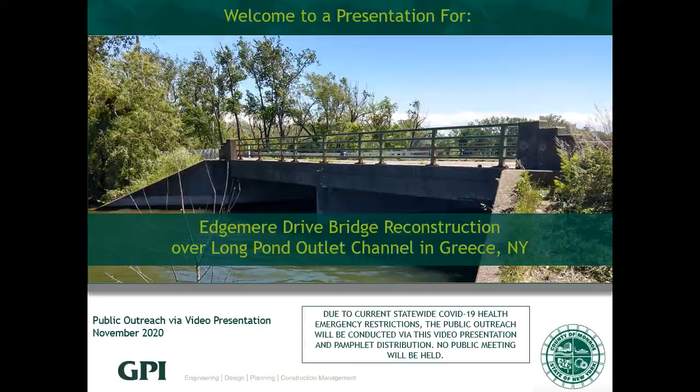This presentation is intended to allow interested parties to review the project details, comment, and ask questions of the Monroe County Department of Transportation, MCDOT, as well as the consultant design staff.

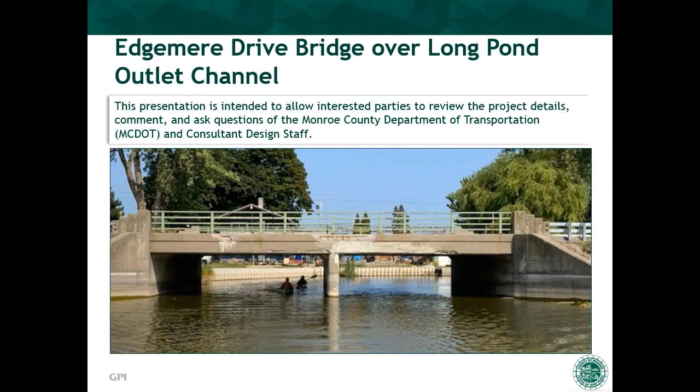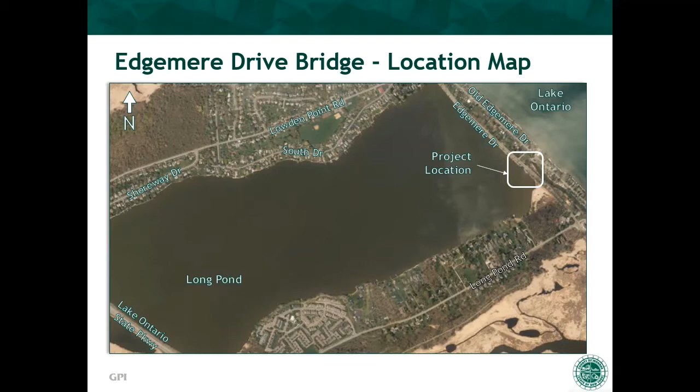Please turn your attention to the aerial image with the approximate project location at the existing Edgemere Drive Bridge. Here is a closer look at the project location. From this aerial, we can see that east of the project, along the Long Pond Outlet Channel, is Goodwin Park and an existing pedestrian bridge over the outlet canal.

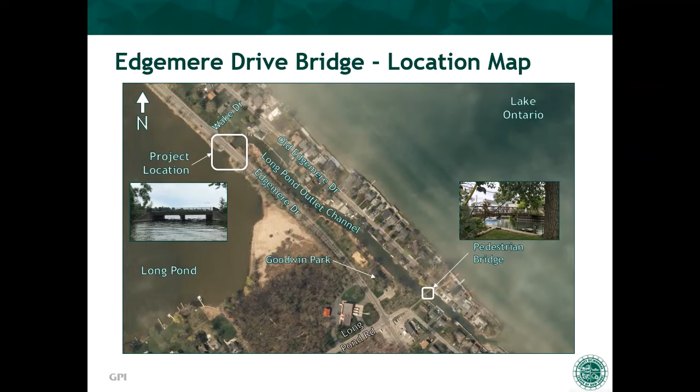The Edgemere Drive Bridge over Long Pond Channel was built in 1953 and is exhibiting several deficiencies that will need to be addressed. The existing bridge is a two-span, 50-foot long reinforced concrete structure with the following features: two clear spans under the bridge of 25 feet each.

Two 12-foot wide travel lanes, one lane in each direction, two 6-foot wide shoulders, two 5-foot wide sidewalks. Clearance between rails is 46 feet.

The existing bridge has a maximum underside elevation of approximately 253 feet. Based on ordinary high water elevation of 246 feet, the clearance above the water surface of the bottom of the bridge is approximately 7 feet under normal conditions.

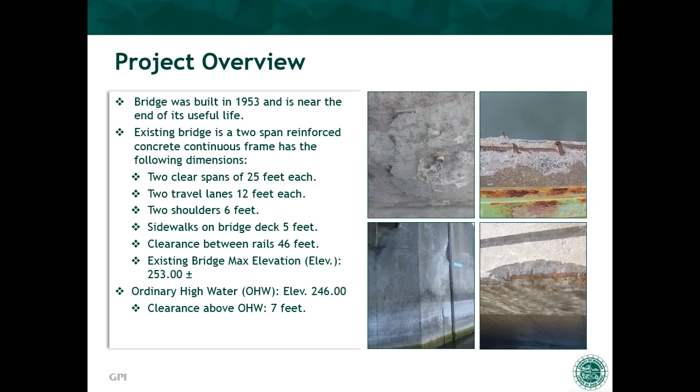New York State DOT collected traffic data along Edgemere Drive in July 2019 and has determined that the current traffic volume in this segment of Edgemere Drive is approximately 2,900 vehicles per day. During the most recent 3-year time period, no accidents were reported in the project vicinity.

There are no hydraulic concerns at the bridge. The water level beneath the bridge is controlled by Lake Ontario, and the flow of water along the canal is considered very minimal. The bridge replacement has no impact on the water level in Long Pond or the Long Pond Outlet Canal.

There are no New York State DEC regulated wetlands within the project limits, but there are federal wetlands present. All necessary permits will be acquired before work commences in the spring of 2022.

While there are no federally endangered species located within the project limits, there are some New York State DEC listed birds that may nest within the vicinity of the bridge.

Measures will be taken to ensure suitable habitats where the birds will not be impacted. In addition, further investigation may be required due to the potential presence of freshwater mussels located within Long Pond.

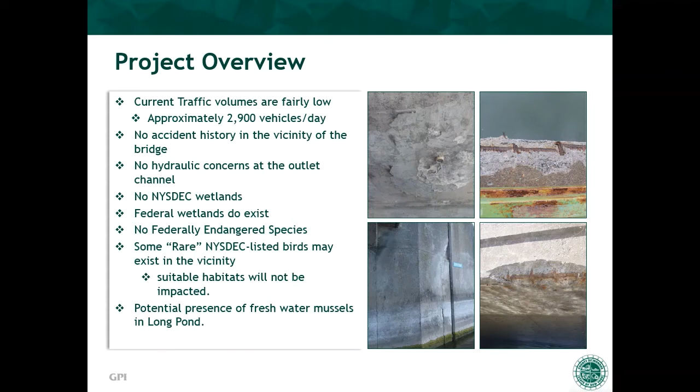The Edgemere Drive highway boundary is 100 feet wide in the vicinity of the bridge. There will be no right-of-way acquisition required for the construction of this project.

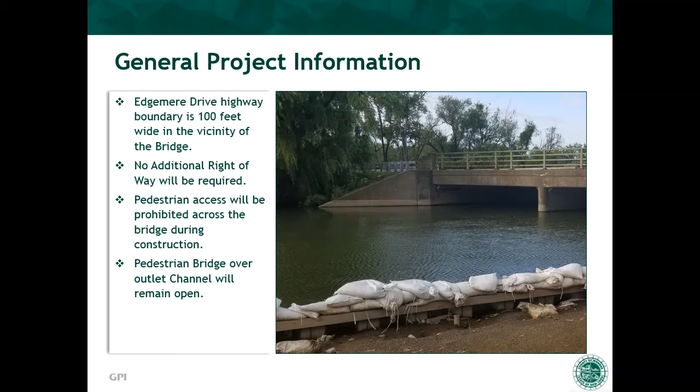During construction, vehicle and pedestrian access across the bridge will be prohibited. The existing pedestrian bridge over the outlet channel, located approximately a quarter of a mile east, will remain open for pedestrian traffic during and after construction.

The design team has prepared a list of objectives for this project. These objectives are: reconstruction of the existing bridge with a modern structure that will meet current structural, hydraulic, and geometrical codes and standards; provide a low or maintenance-free structure that will provide at least 75 years of service life.

Increase the navigational clearance for watercraft under the bridge, if feasible and reasonable. Make general site improvements, if feasible and reasonable.

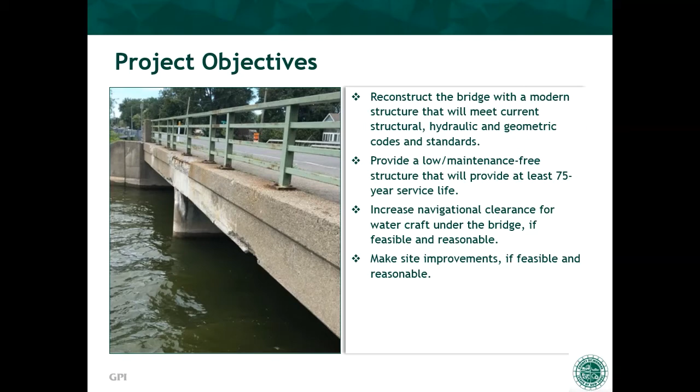The current clearance under Edgemere Drive Bridge, based on the water elevation of 246 feet, is approximately 7 feet, while the clearance for the pedestrian bridge at the same water elevation is approximately 7 feet, 8 inches.

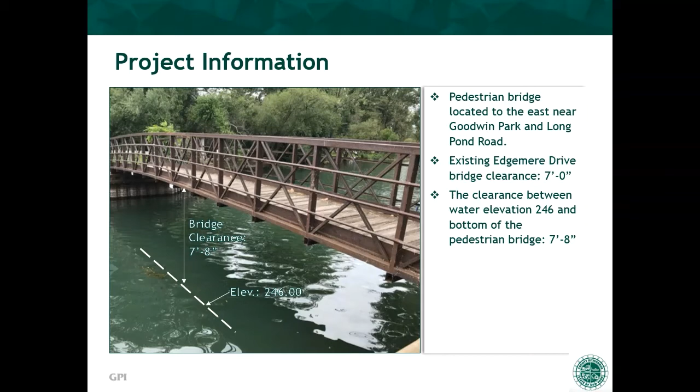There are 5 project alternatives that have been considered for this project. Alternative 1 is the no-build or null alternative. This alternative is normally discussed as a point of comparison to help justify the need for improvements. Under this alternative, the bridge would require an increased amount of maintenance, repair, and would continue to deteriorate to the point where it would be impossible to maintain traffic. At this point, the bridge would have to be closed to traffic and thus not considered a feasible alternative.

Alternative 2A and 2B propose the construction of a steel girder bridge. Alternative 2A would raise the road grade by about 3.5 feet and increase the underbridge clearance by about 1.5 feet. Alternative 2B would raise the existing road grade by about half a foot and would result in a decrease of the underbridge clearance by 1.5 feet due to the deeper bridge beam.

Alternative 3A and 3B propose the construction of a precast concrete arch bridge. Alternative 3A would raise the roadway grade at the bridge by about 3.5 feet and increase the underbridge clearance by 2.5 feet. Alternative 3B would raise the existing roadway grade by about a half a foot and result in a slight increase of the underbridge clearance by about a foot near the center of the arch, but decrease the clearance along the edges of the arch on average 2 feet.

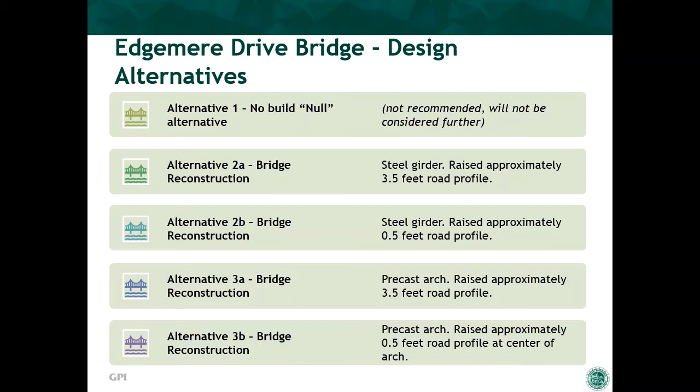This slide further summarizes the features of Alternative 2A and shows a graphic of how the new bridge would fit into the road grade and compare to the existing bridge. As previously mentioned, this alternative would raise the road grade of the bridge by about 3.5 feet and increase the underbridge clearance by 1.5 feet. It is important to note now that all bridge alternatives propose to eliminate the center pier. This will create a continuous span over the channel and improve the navigation under the bridge. This alternative is not recommended by Monroe County due to the maintenance concerns and regular painting requirements associated with steel structures over water.

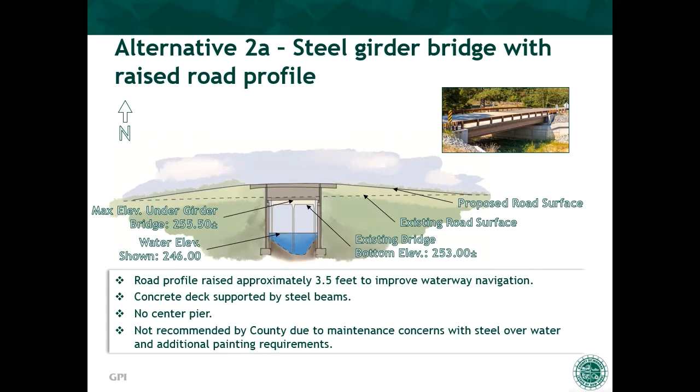Alternative 2B is very similar to Alternative 2A. However, it more closely matches the existing road. As stated before, Alternative 2B would raise the existing road grade by half a foot and would result in a decrease of the underbridge clearance by 1.5 feet due to the deeper bridge beams. This alternative is not recommended by Monroe County due to the maintenance concerns highlighted in the previous alternative and due to the decreased clearance.

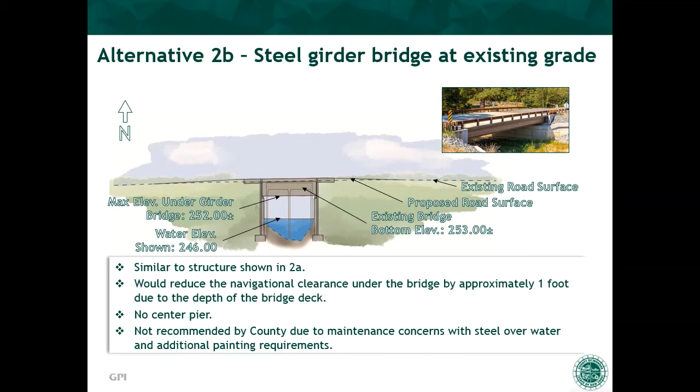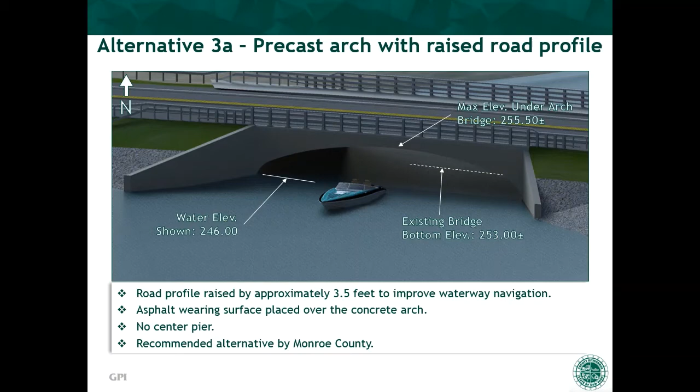Alternative 3A proposes the construction of a precast concrete arch bridge with asphalt surface. The road grade at the bridge would be raised by 3.5 feet to increase the underbridge clearance by approximately 2.5 feet. Additional site enhancements consist of side slope improvements from the edge of the pavement to the water with a combination of turf near the road and stone slope protection near the water surface. Alternative 3A is the recommended alternative due to the reduced maintenance cost, durability, aesthetics, quality, and improvement to navigational capacities.

Alternative 3B proposes the construction of a precast concrete arch bridge at the existing road grade. This would result in a slight increase of the underbridge clearance by about a foot near the center of the arch. However, it would decrease the clearance along the edges of the arch by an average of 2 feet. This alternative is not recommended by Monroe County due to the decreased navigational clearance near the edges of the arch.

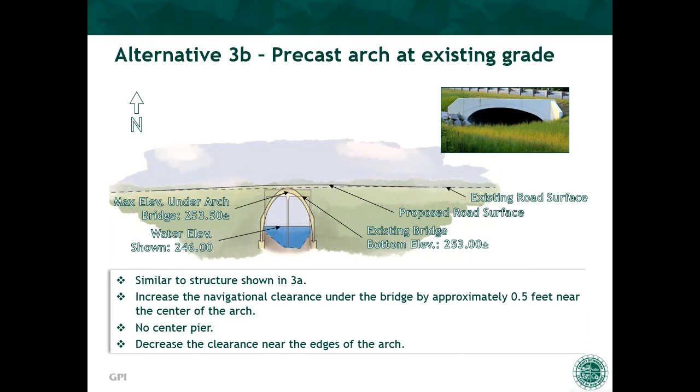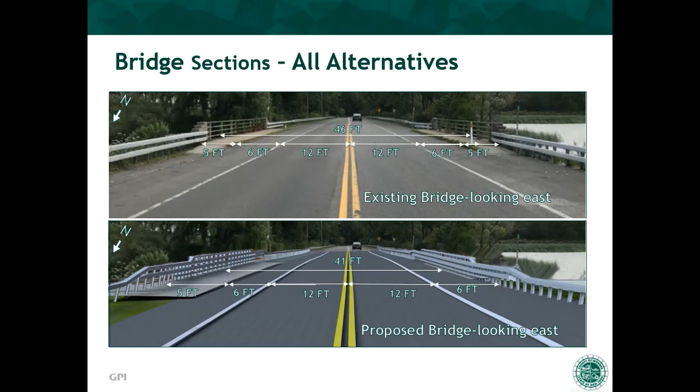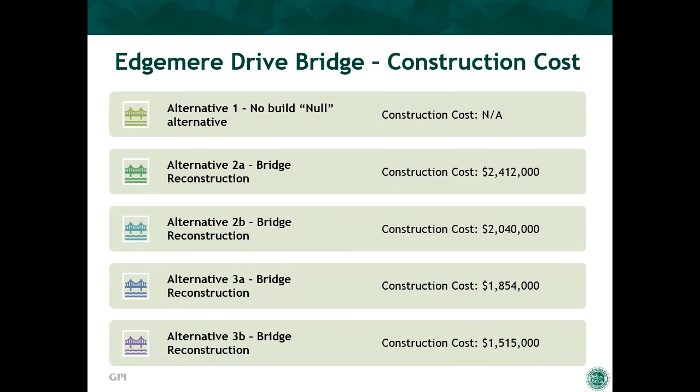The anticipated schedule for the project bidding is November 2021. The construction itself will occur in the late spring and summer of 2022 and last 3 to 4 months, weather permitting.

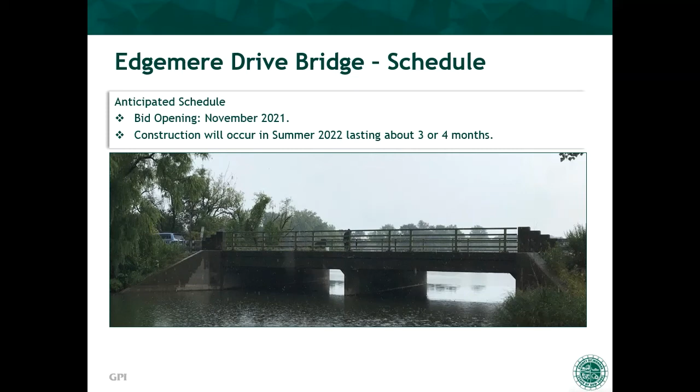The reconstruction of the bridge will require a detour posted along Coon Road, Long Pond Road, Flynn Road, and Loden Point Road. Local traffic will be maintained up to the bridge closure on each side. The detour is approximately 5.3 miles long, resulting in roughly 10 additional minutes of travel time, assuming average local traffic volumes. Monroe County will coordinate with emergency services to minimize impact in the vicinity of the bridge. Lakeshore Fire District has already been notified of the future bridge closure, and the county will continue to coordinate directly with all emergency services. A copy of the proposed detour route can also be found within the informational pamphlet that is posted on the same website as the link in the presentation.

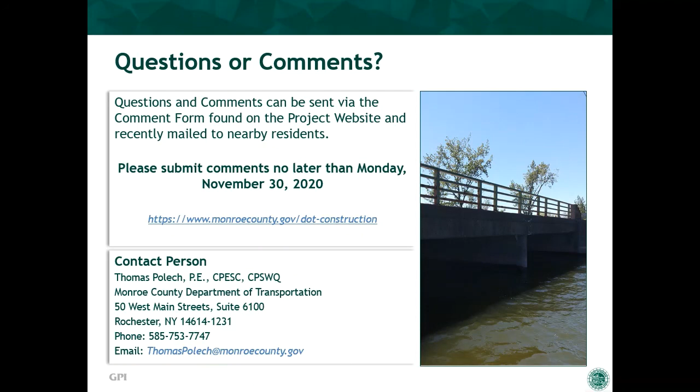Thank you for your time reviewing this presentation for Edgemere Drive Bridge reconstruction over Long Pond Outlet Channel in Greece, New York.